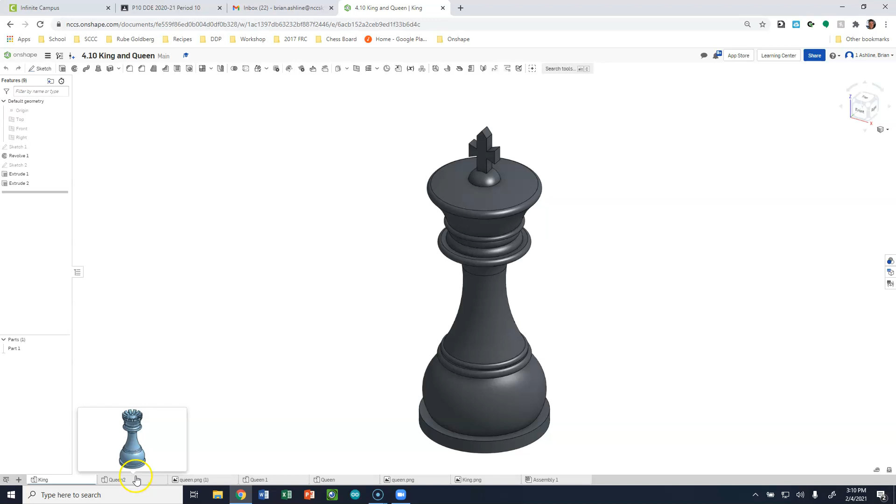All right, ladies and gentlemen, let's talk about what we're going to need to do to turn in our work. At this point, you should have your king done and your queen done.

I think I'm going to turn this queen in though. Of course you don't have to have multiples, but I'm going to turn my original queen in and my king in here.

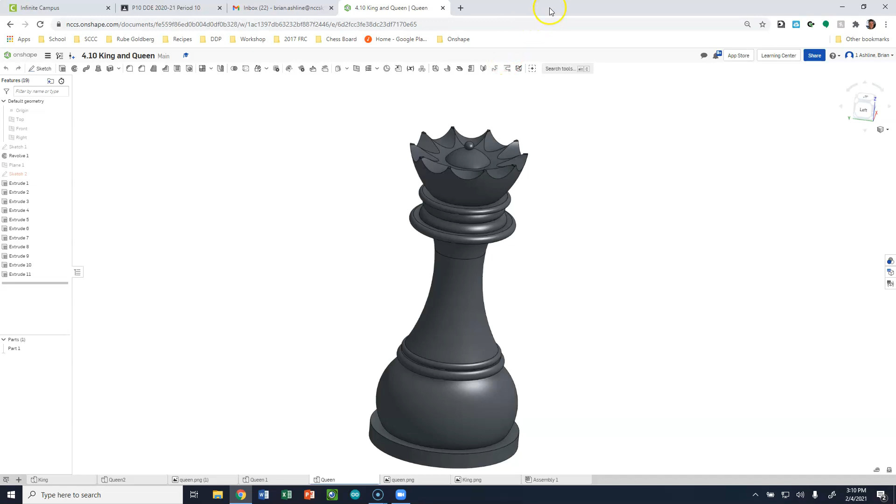We're going to make drawings of this. We're going to click the plus sign down below and say create drawing. For this one, we're going to do a horizontal sheet, so not portrait but the regular one, and we're going to say okay.

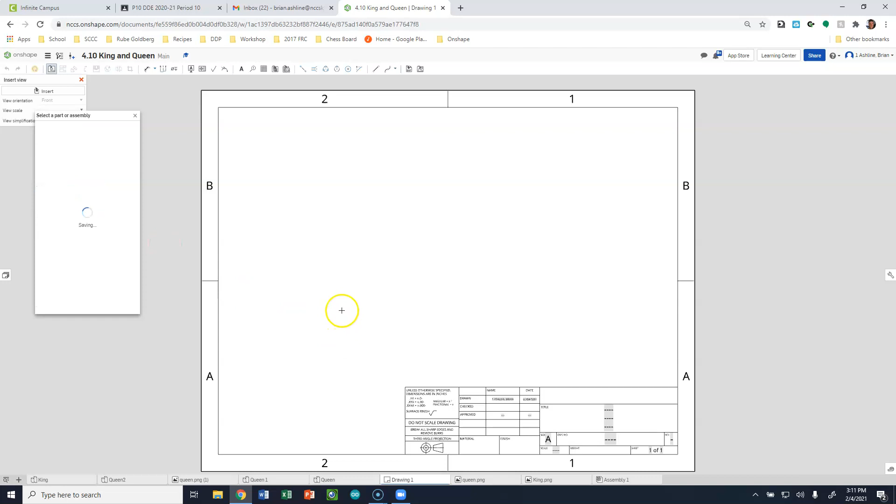We're going to put the front view and the top view of both of these objects onto the same place. So we're going to select the king. I'm going to select my king and bring this in here.

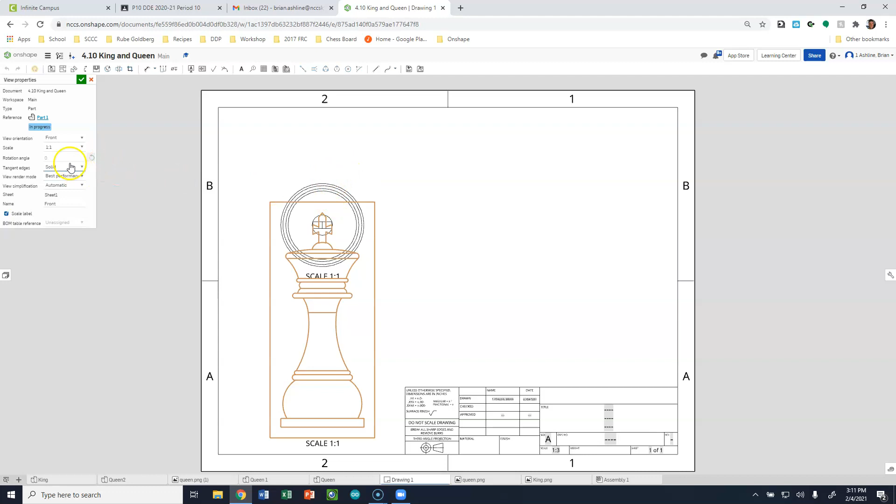My view scale right now is pretty small, so I'm going to drag this up, go back in, double click on that, and change my scale instead of 1/3. I really want it full scale, but let's say half scale instead. So half scale, yeah, that's half scale.

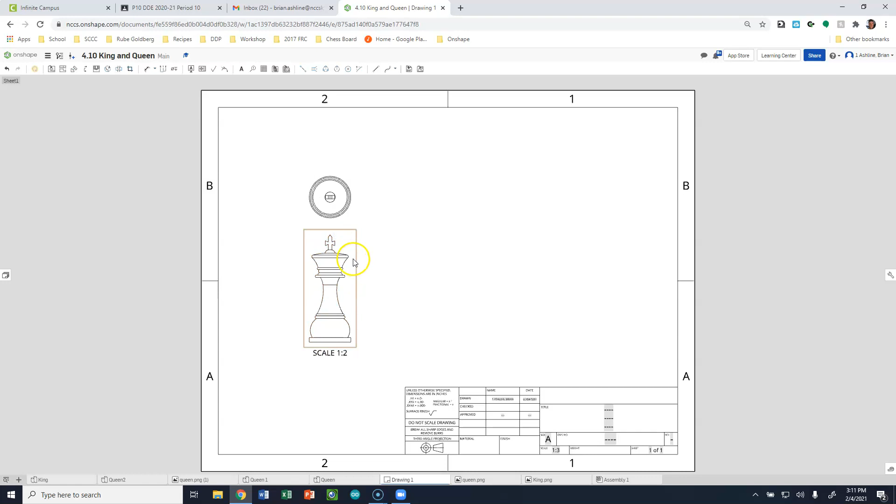Scale label, check. Okay, get rid of this scale label. So that's my king and the diameter of my king.

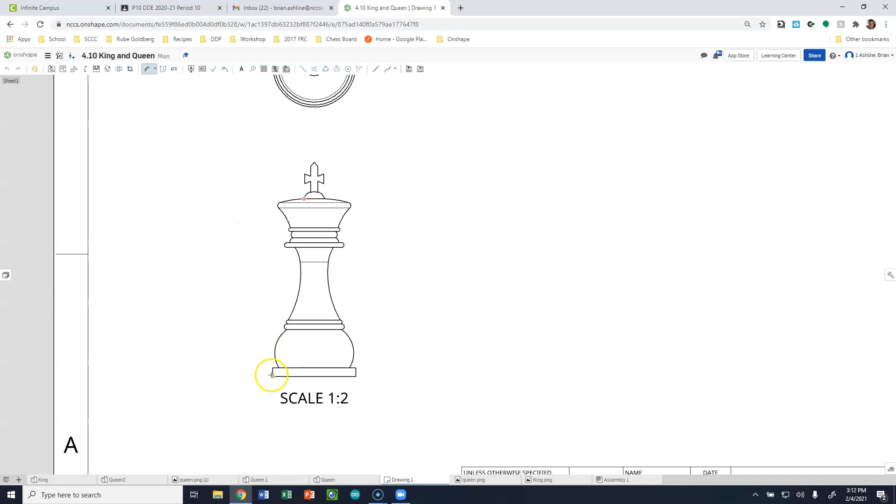I really only care about two major dimensions here. I care about the dimension from the bottom of your king to the bottom of your finial, which for me is right here. So dimension from here to here, that should be like 3 3/4 to 4 1/4 high, let's just say. I don't really care about the height of the finial.

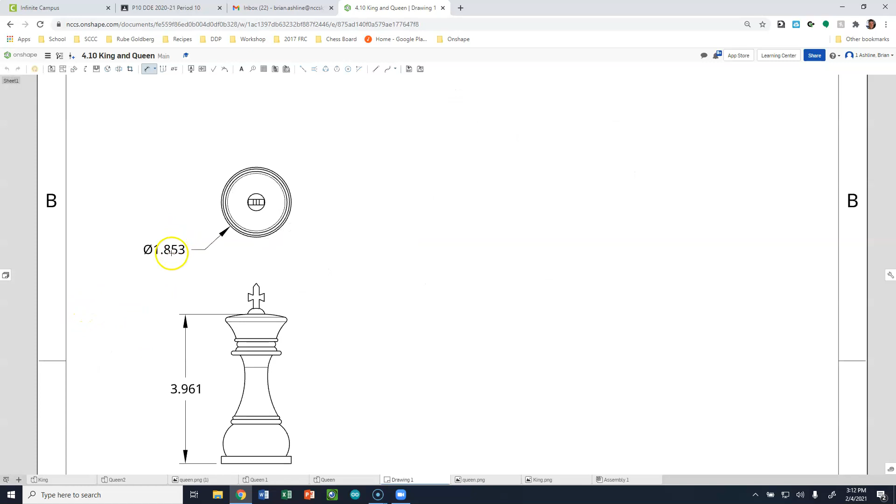Then I care about the overall diameter, so the biggest circle on the top. Again, that should be not quite 2 inches, but almost 2 inches. So that's fine there, I'll just leave both of those like that.

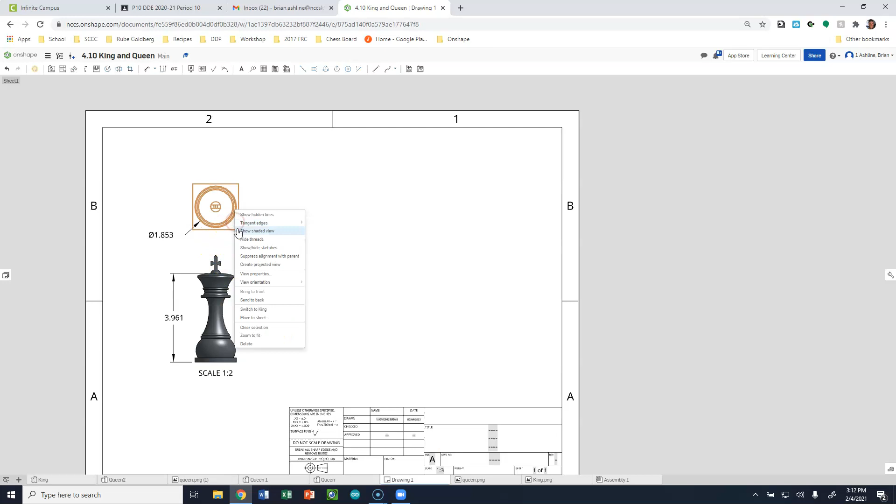The other thing here, when I right click on this image, I'm going to say show shaded view, and that's going to color that in. I'm going to do the same thing on the top, show shaded view, and that's going to color that in.

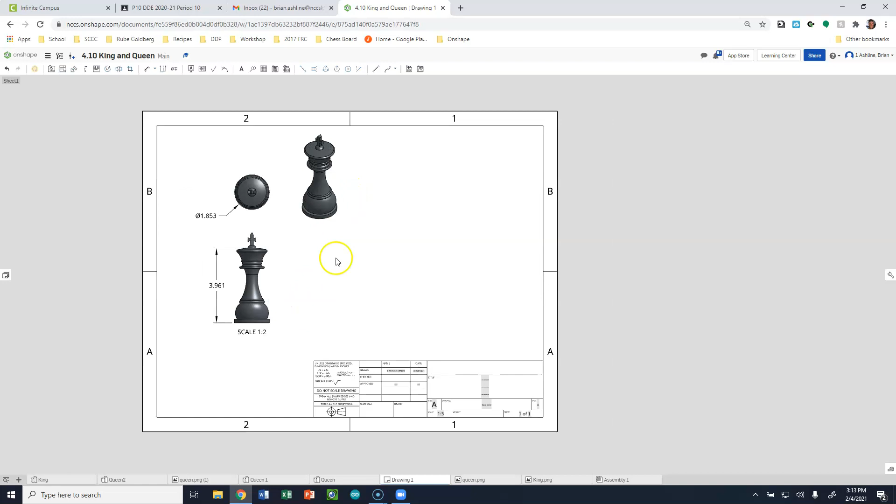I want to project my front, my king. I want an isometric, so I'm going to select that and hit the P, and I'm going to bring that up. Again, that scale doesn't change, so it doesn't need to be like that. So that's my king over there on that side of the sheet.

Now I'm going to come up and insert a new view. This time I'm going to select the insert, and I'm going to select my regular queen, not queen 2, queen. Same sort of thing: if my scale before was a half, the scale for this is going to be a half.

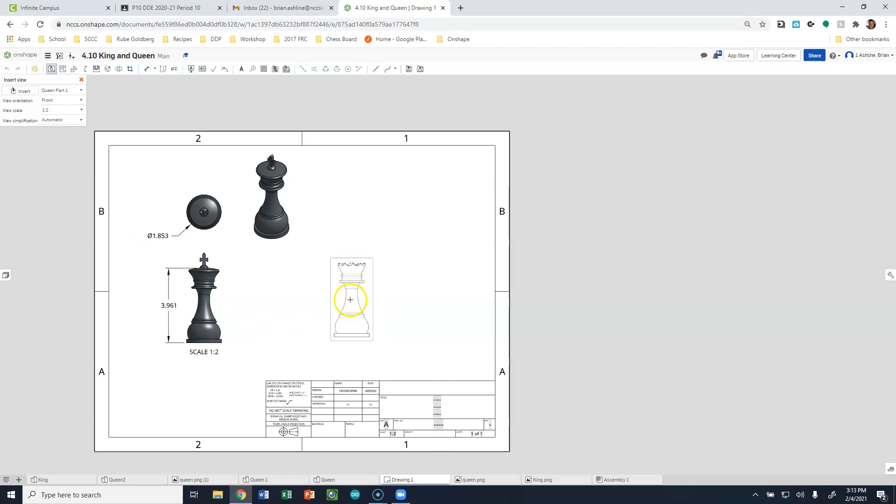I'm going to put my queen down here. I'm going to project the top of my queen to here, and project an isometric view of my queen up to here. Again, let's delete these scale labels.

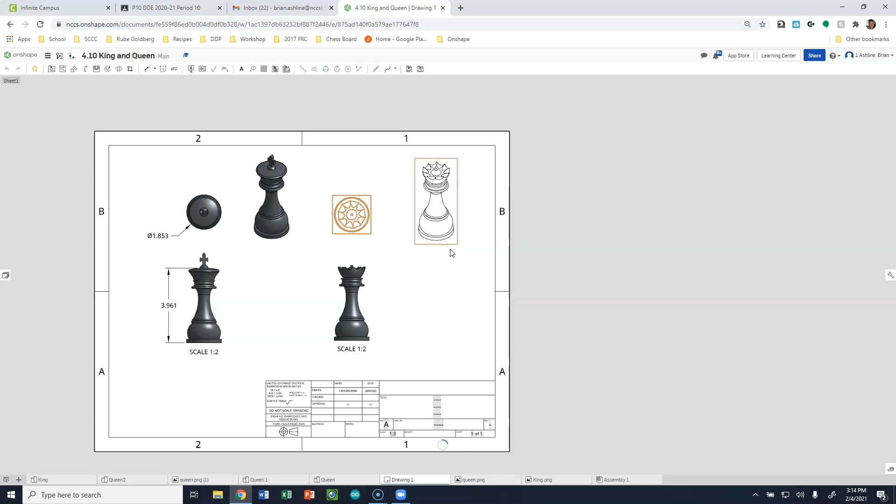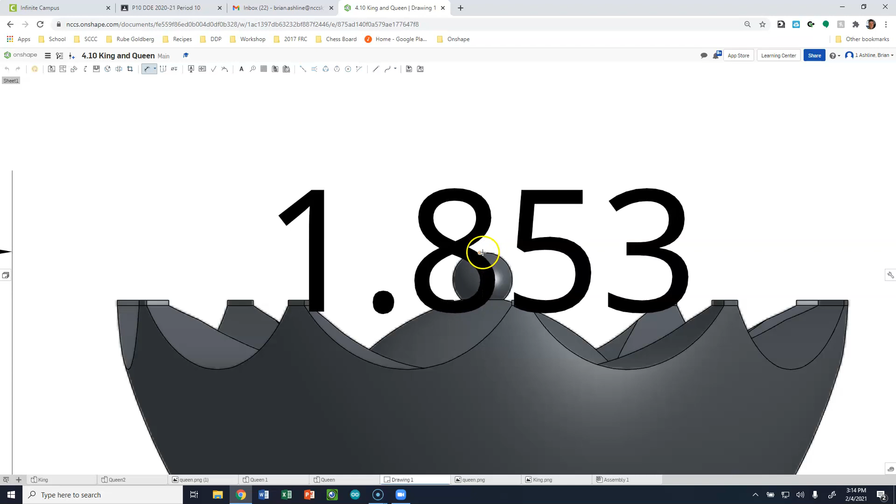Again, two major dimensions for this. I just really care about the bottom to the very top of my ball. I'm going to bring this out. So again, from the bottom to the top of the ball, this should be about 4 inches. Mine, I guess, is exactly 4 inches.

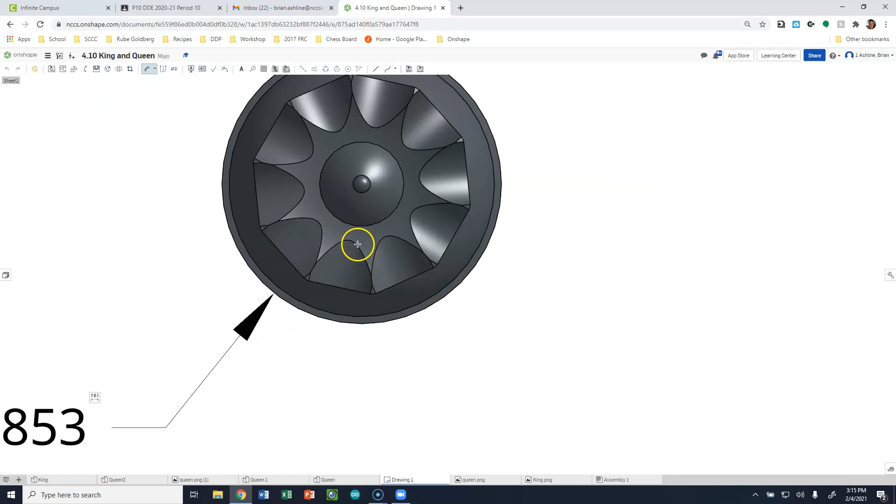Awesome. And then again, the largest diameter at the top, which hopefully, because you use the same exact base as your king, is exactly the same. And I really want my king and my queen as lined up horizontally as possible. I want this and this to be lined up.

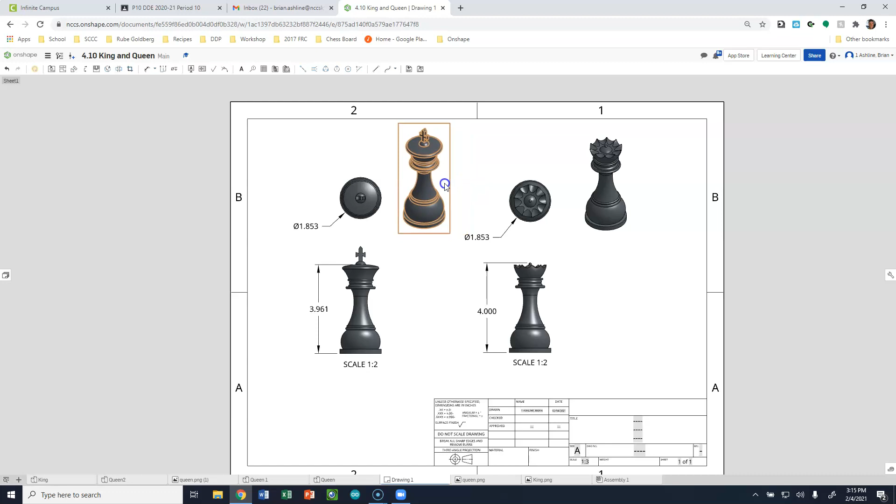Let's get my dimension out of there, clean that up. Queen, king, boom, okay. So title: king and queen. Check. Put that in the middle.

You've got your name. Scale down here is wrong. That scale really should be 1 to 2. Bingo.

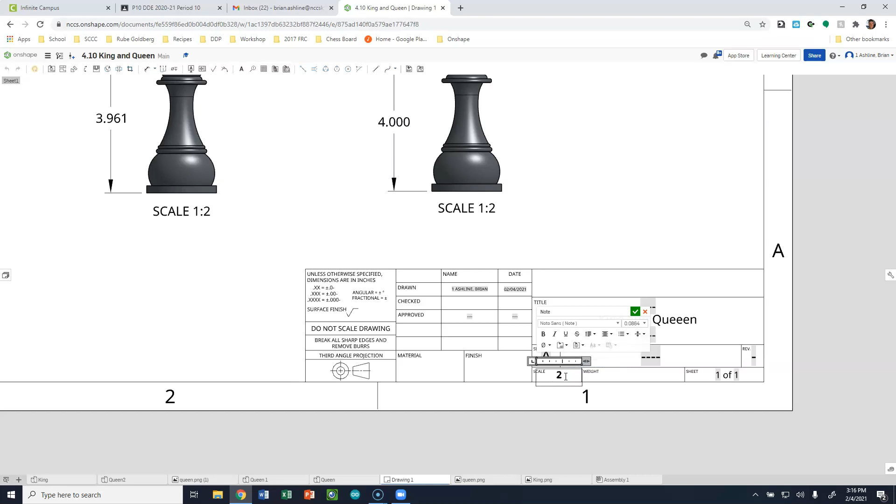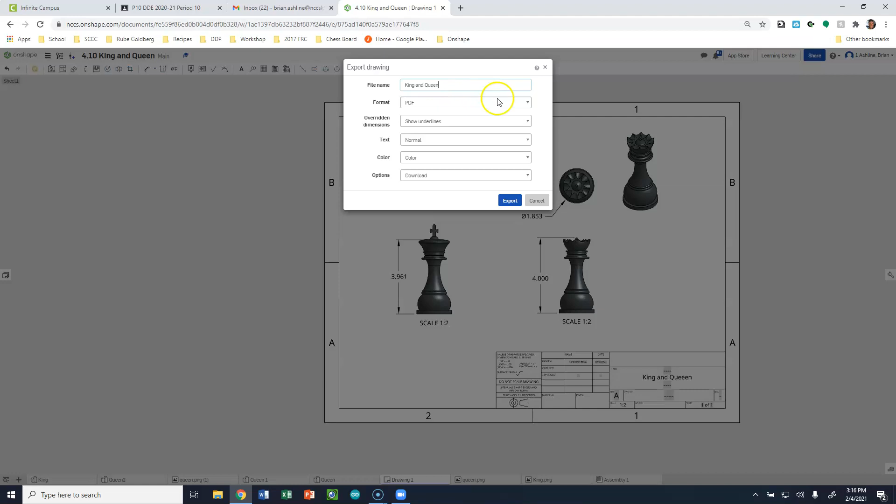And we're pretty much ready to export. So again, you could go up to the thing up here and come down to print. I also figured out that if you right click down here, you can say export, and we can call this the king and queen. We can export it as a PDF, we want it in color, and we're going to download it, so we're going to export.

Now here's my PDF down here. You can move this PDF to your folder, your drive, and then you can attach this PDF to the assignments to be graded. The king is worth 5 points, the queen is worth 5 points.

This whole project is going to be worth double though, because we have been spending so much time on it. So it's more a project than it is a classwork. It's going to count as 2 class assignments, but a total of 10 points.